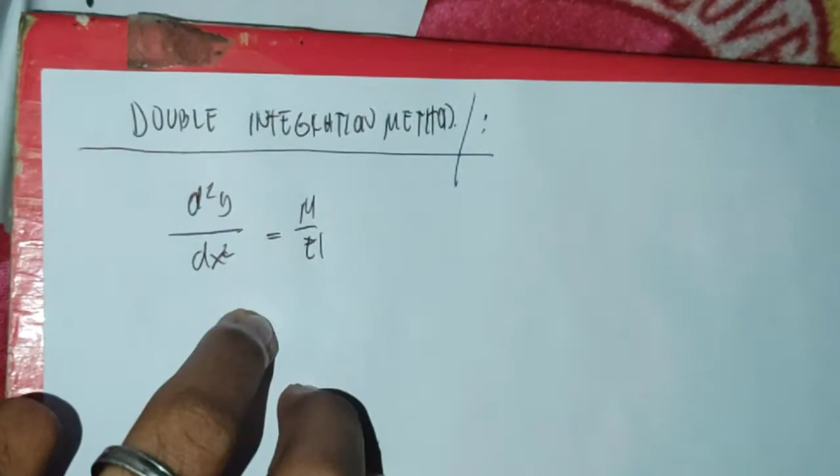In the double integration method, we have the equation d squared y over dx squared equals M over EI. This equation represents our curvature, which is also equal to y double prime.

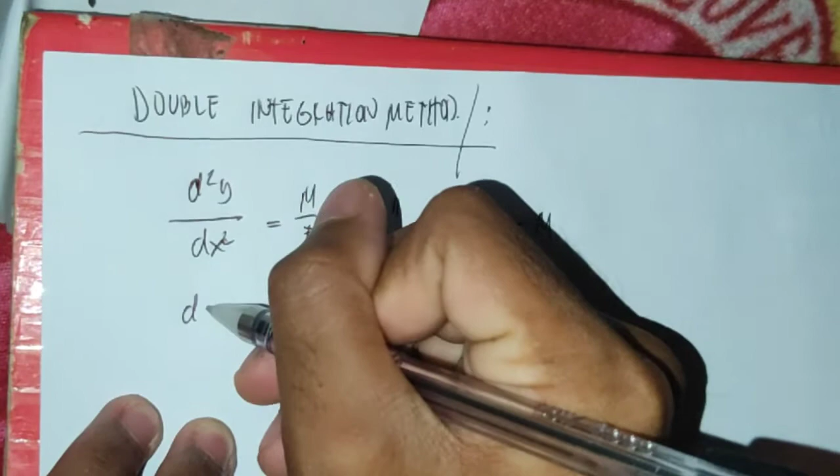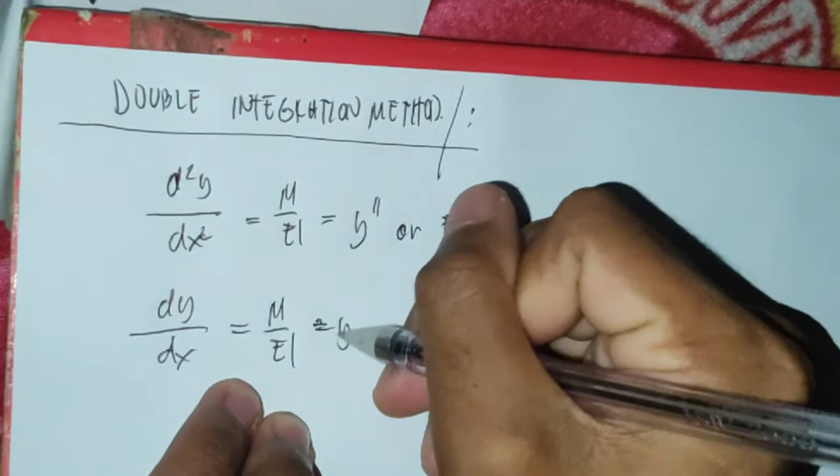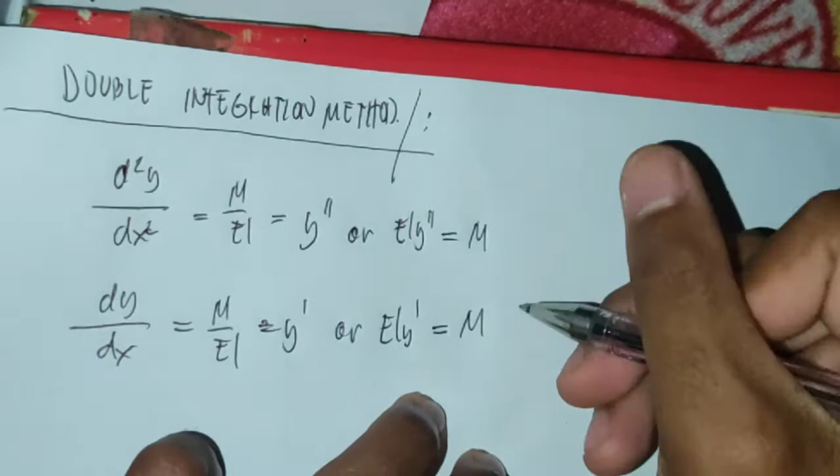Then we integrate this, giving us the derivative of y with respect to x equals M over EI, or EI y prime equals M. This equation represents our slope, or d theta.

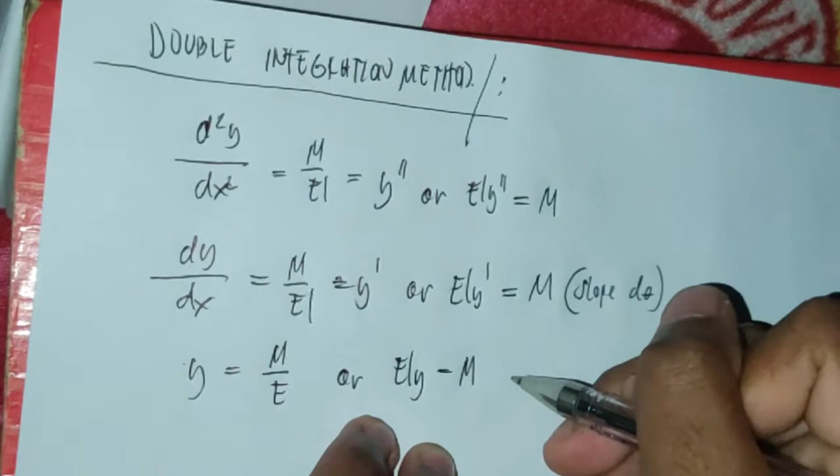Then we integrate this again, giving us y equals M over EI, or EI y equals M. This equation represents our deflection.

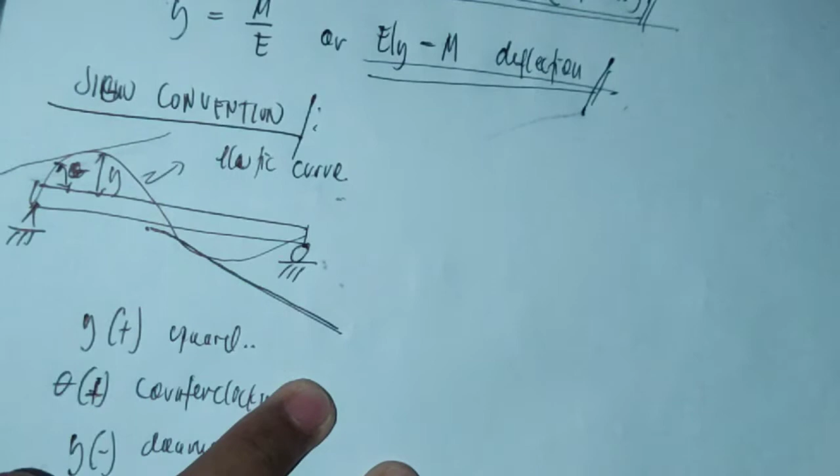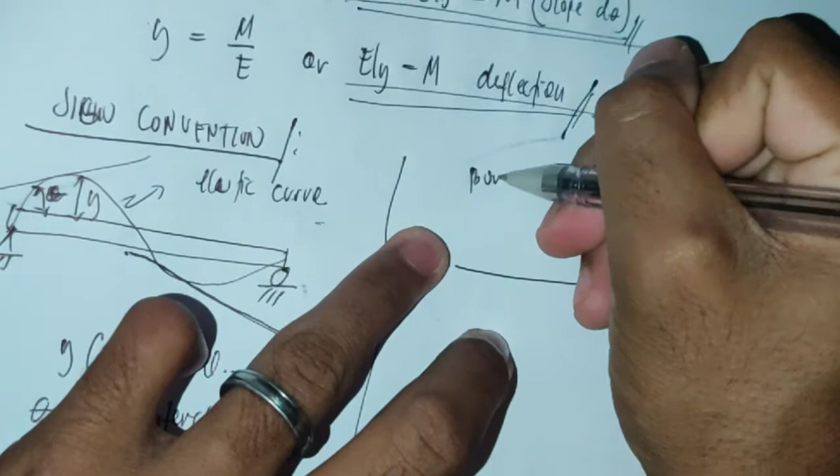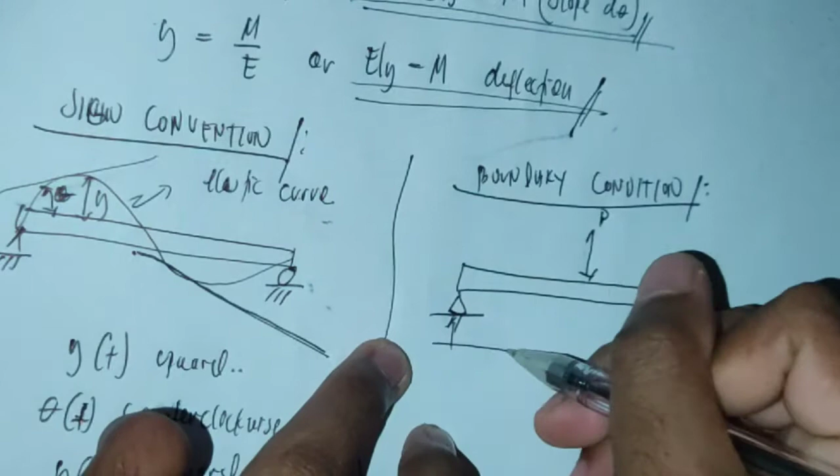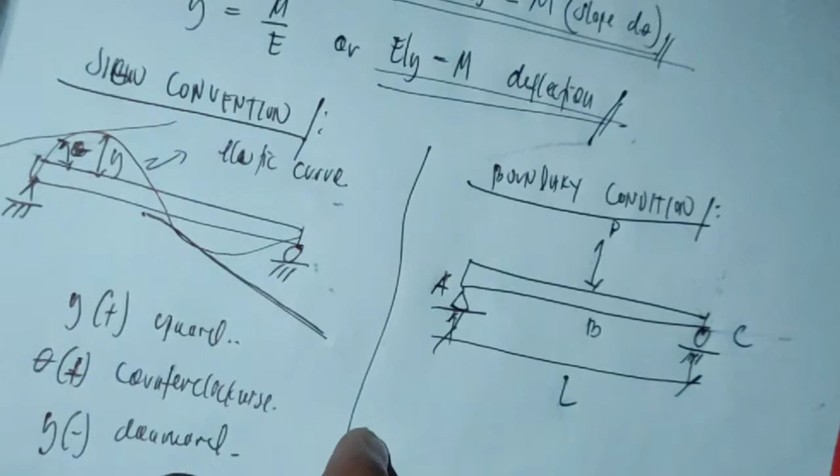We have a beam with two supports. Let's place a load P and distance L. First, let's label points A, B, and C. First, we make an equation from point A to point B.

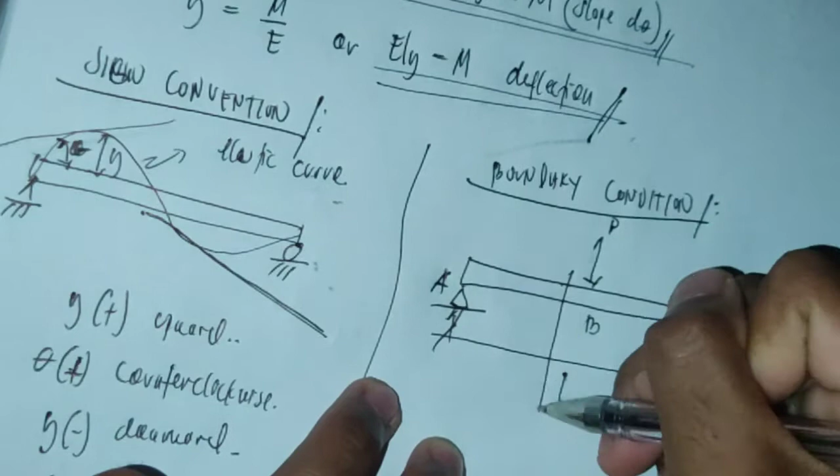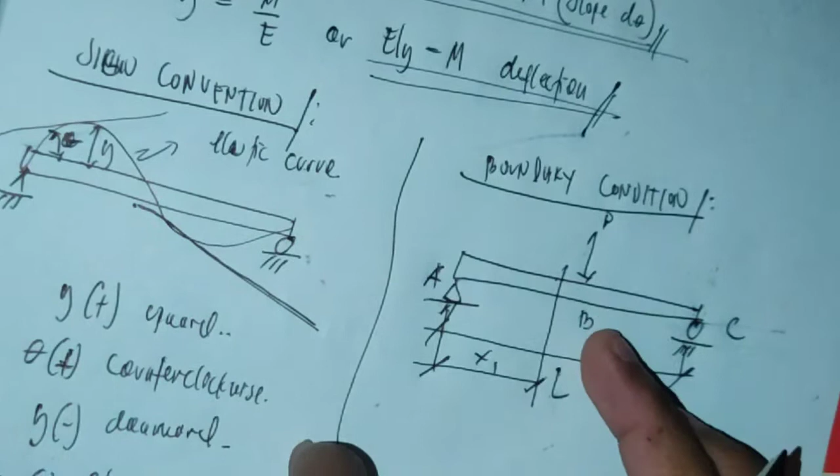Then we determine its slope and deflection. So here we have x sub 1. Then from point B to C, we get the deflection, and its distance becomes x sub 2.

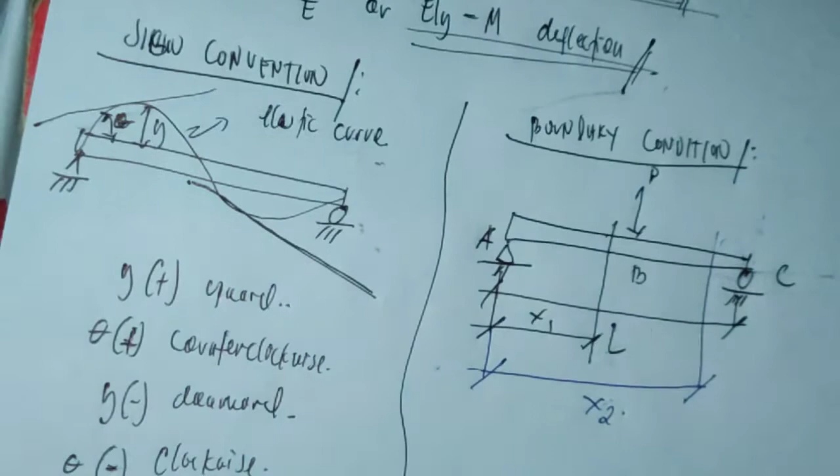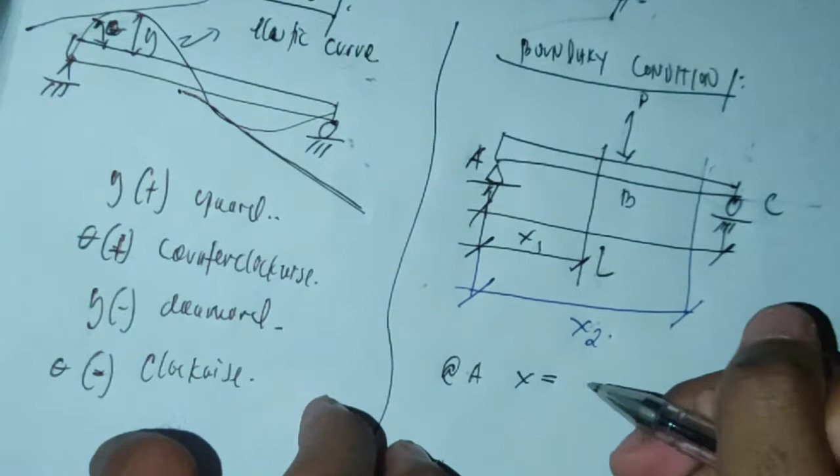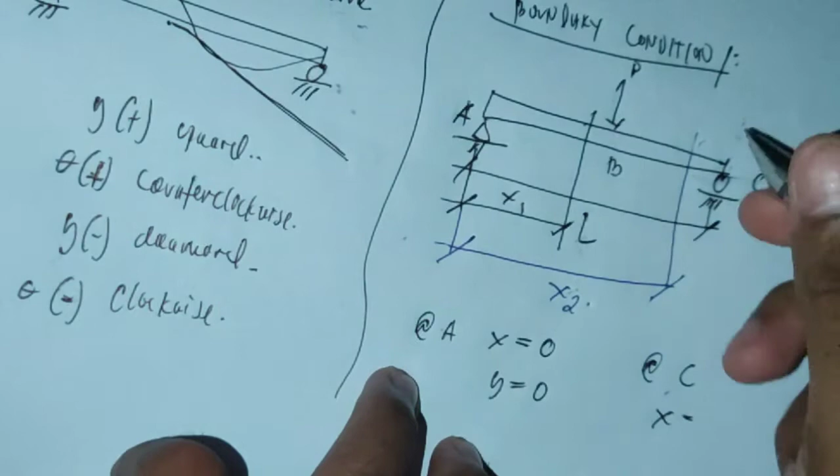At point A, our x is 0 and our y is 0. At point C, since the total is this length L, our y is 0. Then our slope here is not 0 because it has a pin and roller support.

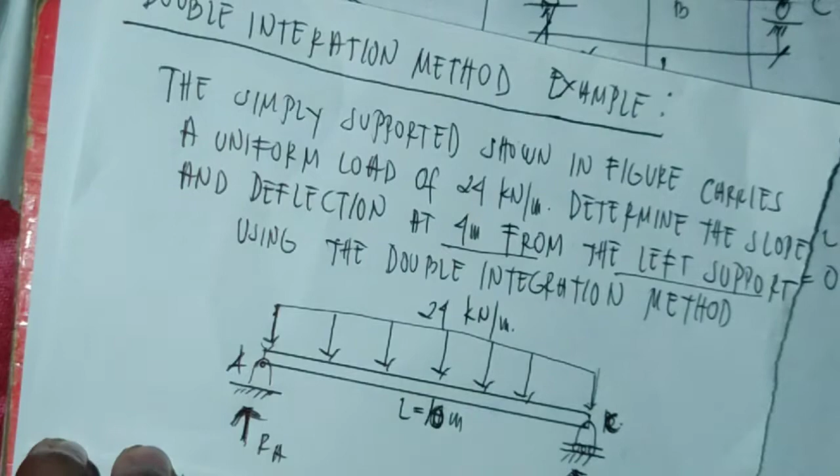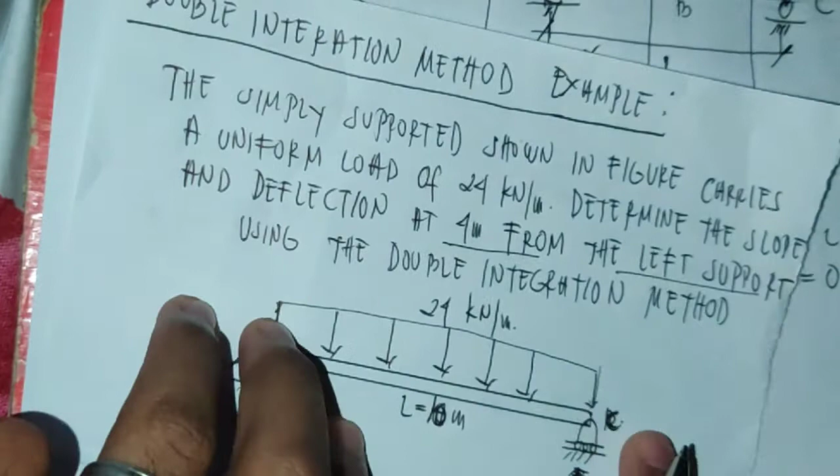So to understand this, let's answer an example. A simply supported beam shown in the figure carries a uniform load of 24 kN per meter. Determine the slope and deflection at 4 meters from the left support using the double integration method. So here we have a beam, two supports, a load, and a length.

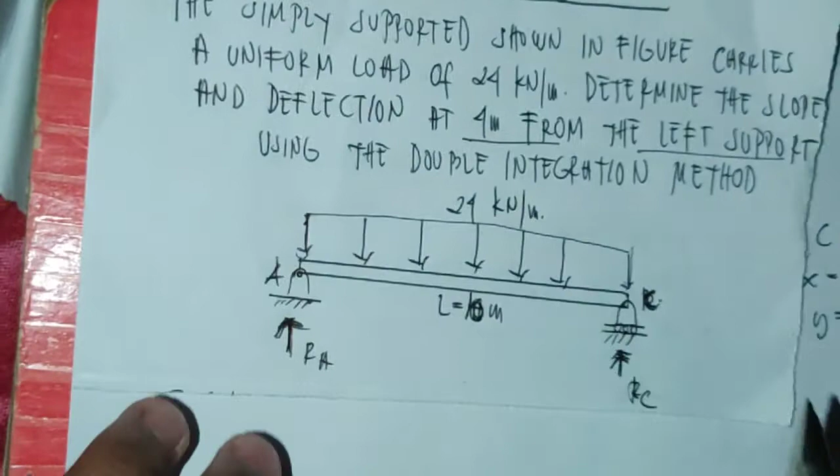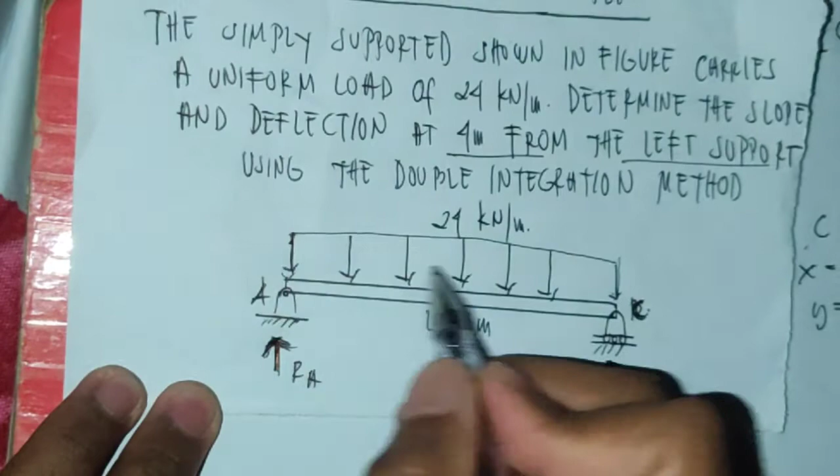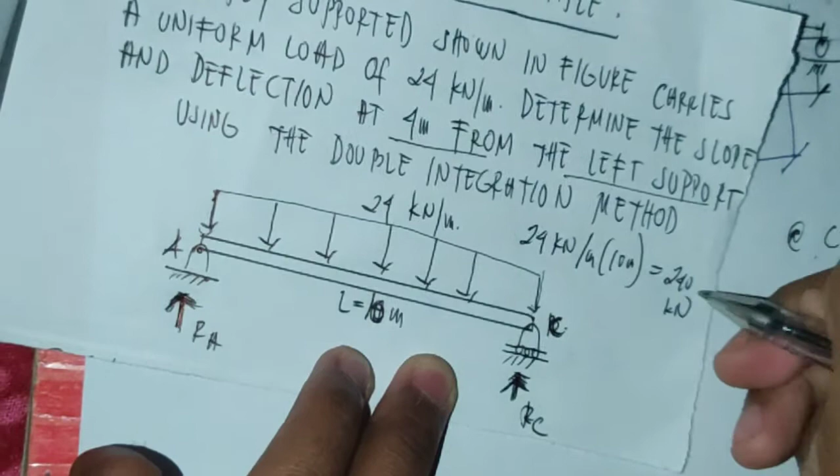This means for a uniform load, we compute 24 kilonewton per meter times 10 meters equals 240 kilonewton. So that's the total load.

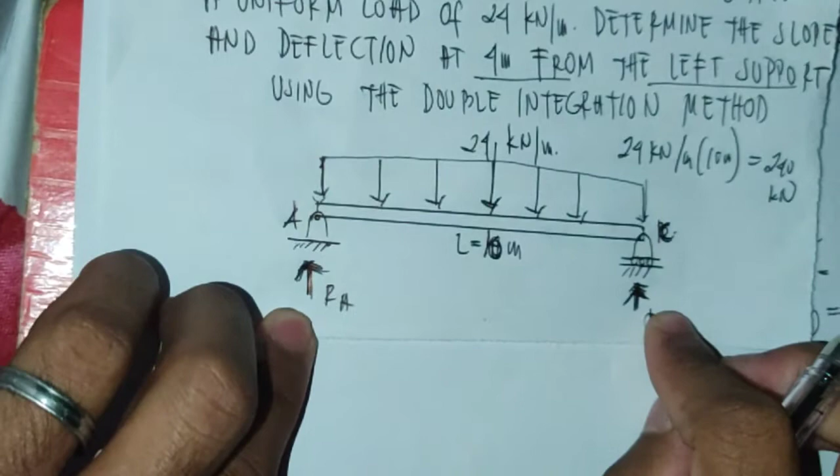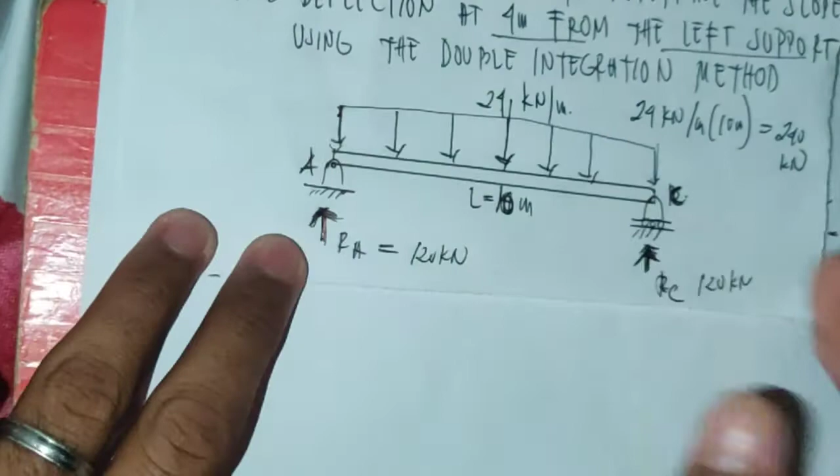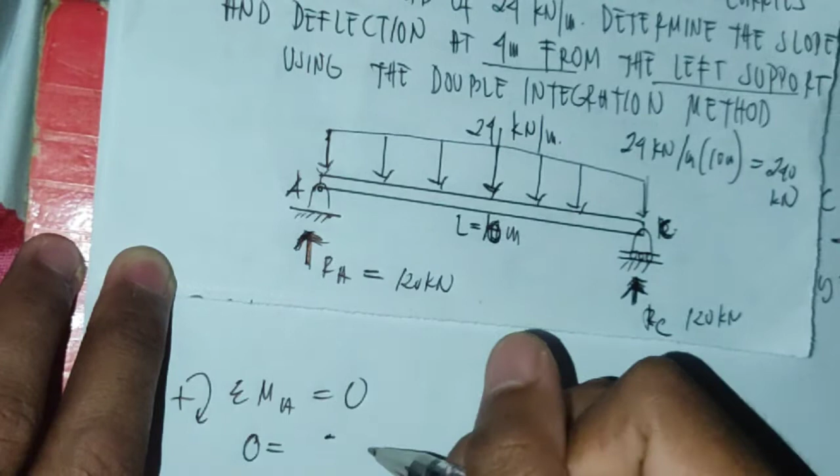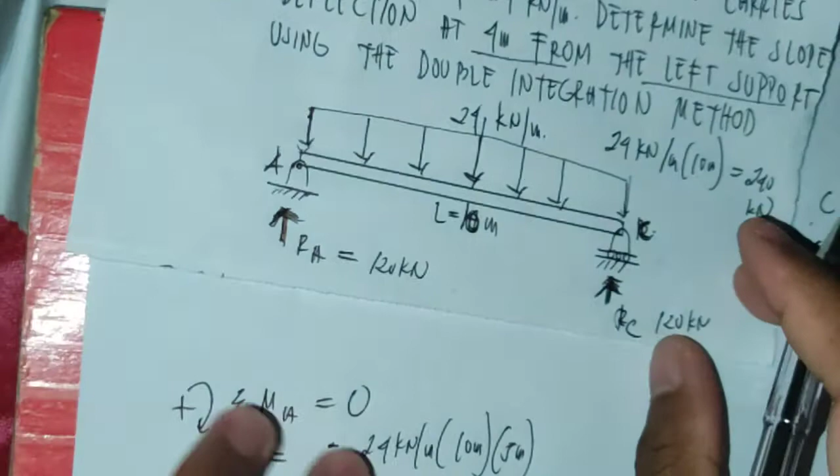So, summation of moment at A, with counterclockwise as positive: 0 equals clockwise, negative 24 kilonewton per meter times 10 meters times centroid, which is 10 divided by 2, equals 5. Then counterclockwise again, plus RC times 10 meters.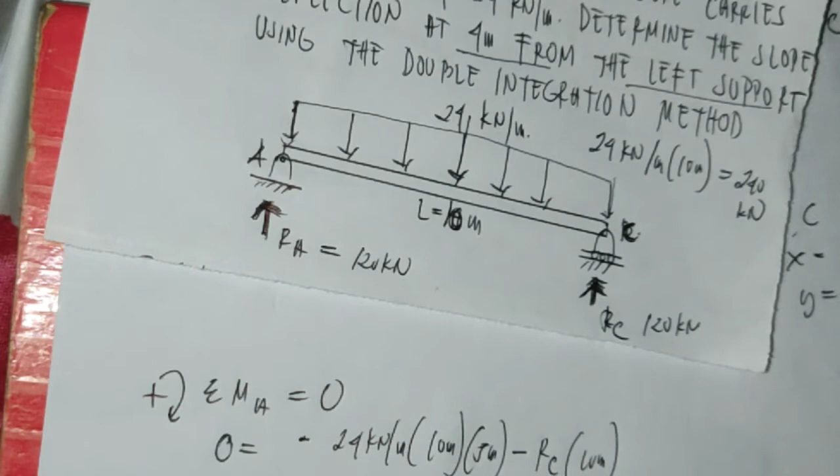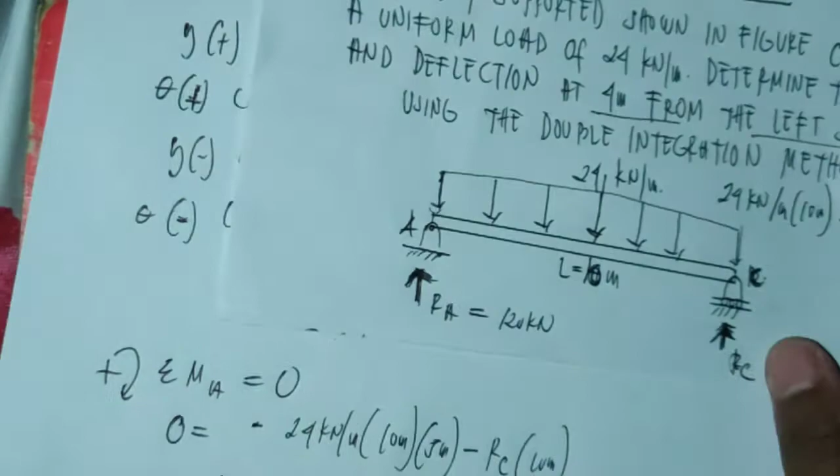So let's compute: negative 24 times 10 times 5 minus RC times 10. So that gives us 120 kilonewton. Now we know the reactions of the two supports. Let's draw our elastic curve.

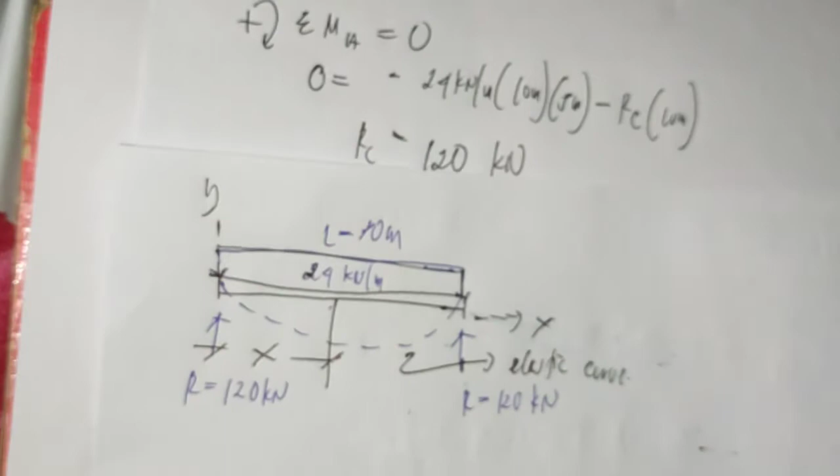So ngayon ito na yung ating elastic curve. Ito yung elastic curve. Slope. Tapos magkakaroon tayo dito ng deflection. At ang distance nito mula dito ay gagawin natin x.

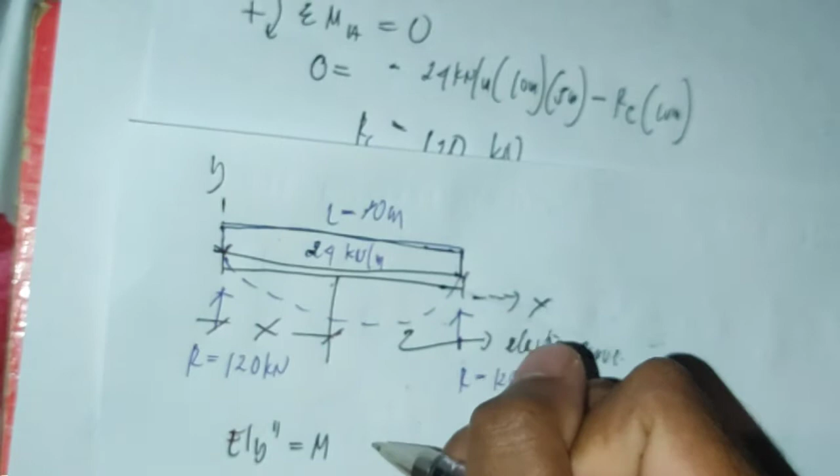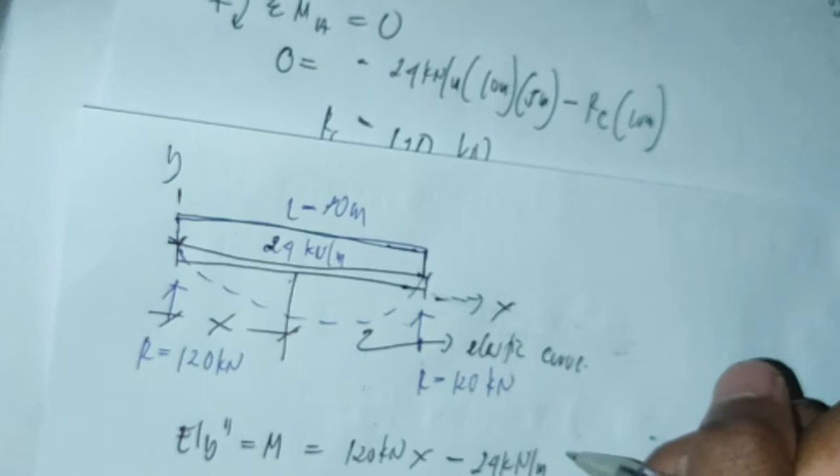So gagamitin natin dito yung mga na-derive natin kanina. Sisimula tayo sa EI y double prime is equals to M. So mag-moment tayo. So equals 120 kilonewton times x minus 24 kilonewton per meter times x times centroid na x divide 2. So, ito ay magiging 120x minus 12x squared.

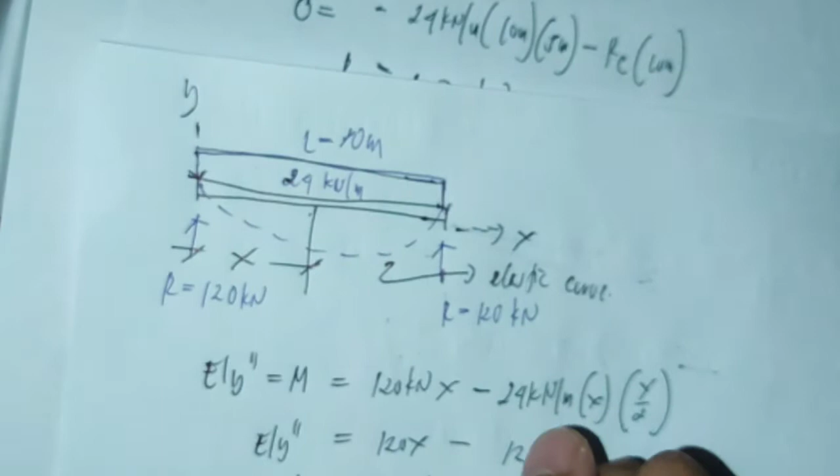Then, since meron tayong nakuha ang EIY double prime, integrate na lang natin to. So, EIY prime is equals to integral nito 120x squared all over 2 minus 12x cubed all over 3. So, simplify. Ito ay equals din sa 60x squared minus 4x cubed plus C1.

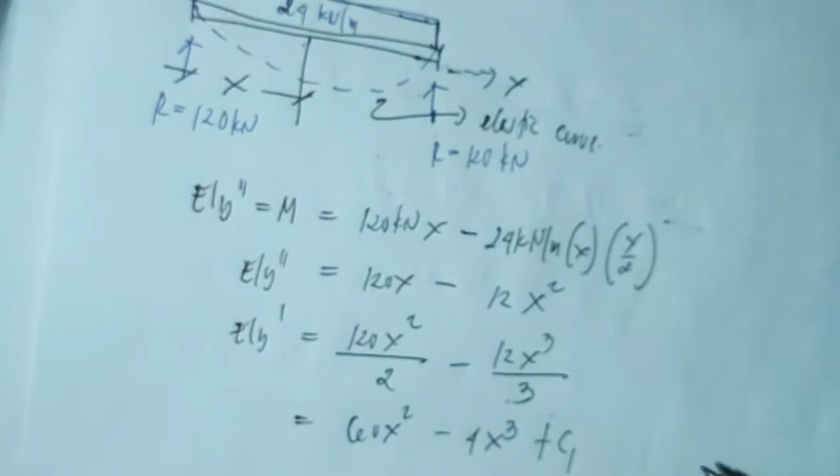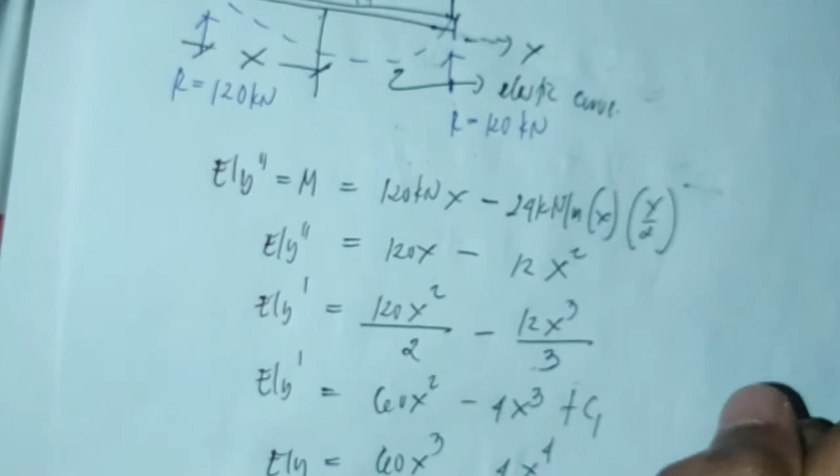EIY prime. Then, another integration. So, magkakaroon tayo dito ng EIY is equals to integral nito 60x cubed over 3 minus 4x to the 4th over 4 plus C1x plus C2. Then simplify. 20x cubed minus x raised to 4 plus C1x plus C2.

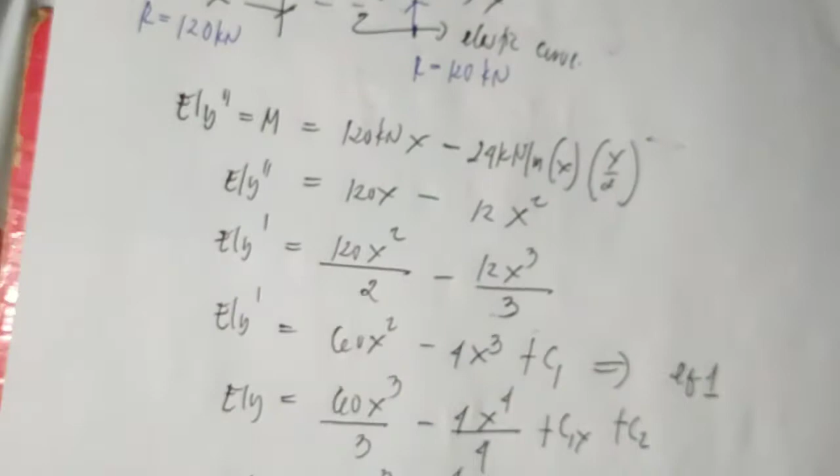Ito na yung ating equation 2. Ito yung ating equation 1. Ito yung ating mga gagamitin para sa pagkuha ng ating slope at saka deflection.

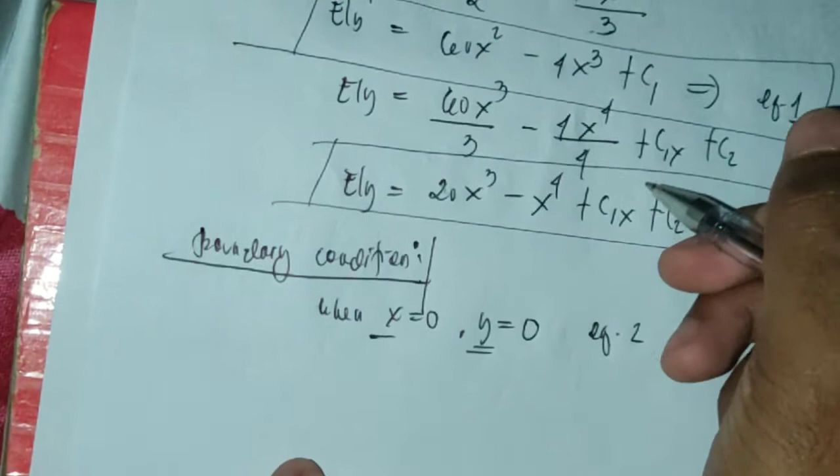Proceed tayo sa ating boundary condition. Boundary condition. So let's say when x is equal to 0, y is equals to 0. Gagamitin natin dito yung ating equation number 2. So when x is equal to 0, y is equal to 0, obviously, pag ginamit natin itong equation na to, lahat 0. Ito, 0, 0, 0, 0. Yung maritira is C2. So, C2 is equals to 0.

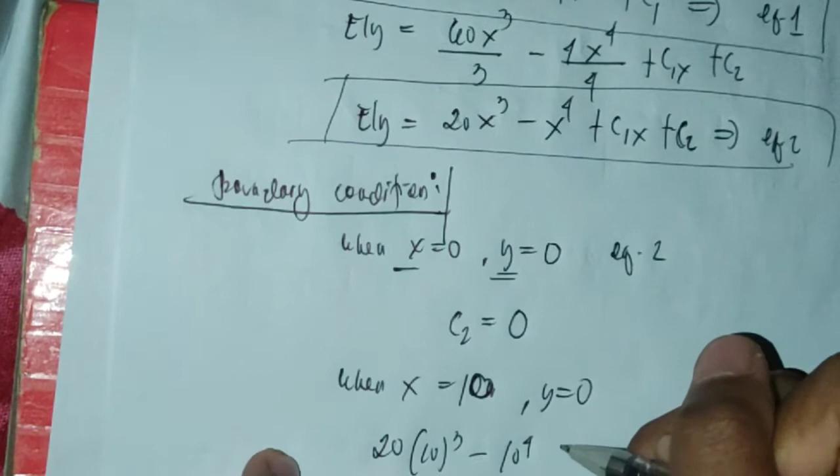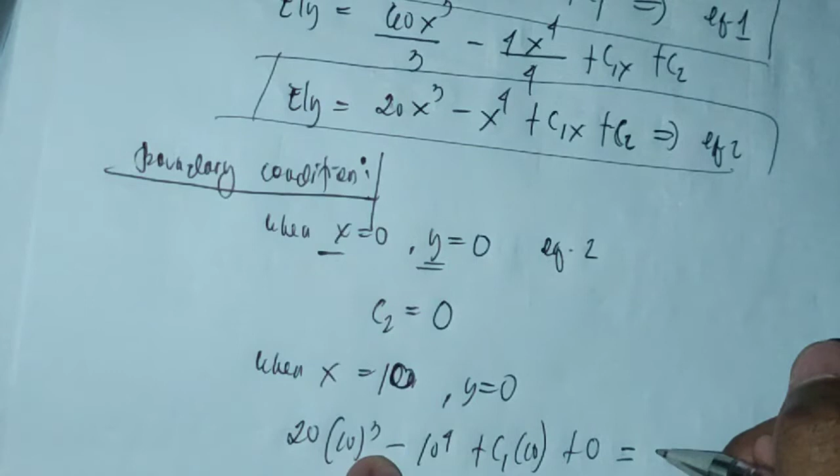When x is equal to 10 meters, y is equal to 0, substitute again sa equation number 2. Kakaroon tayo ng 20 times 10 raised to 3 minus 10 raised to 4 plus C1 times 10 plus 0 is equals to 0. Ang value ng ating C1 is negative 1,000.

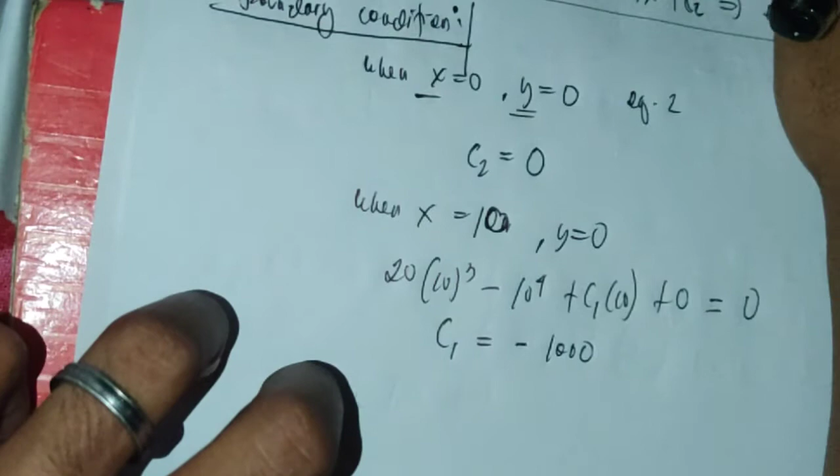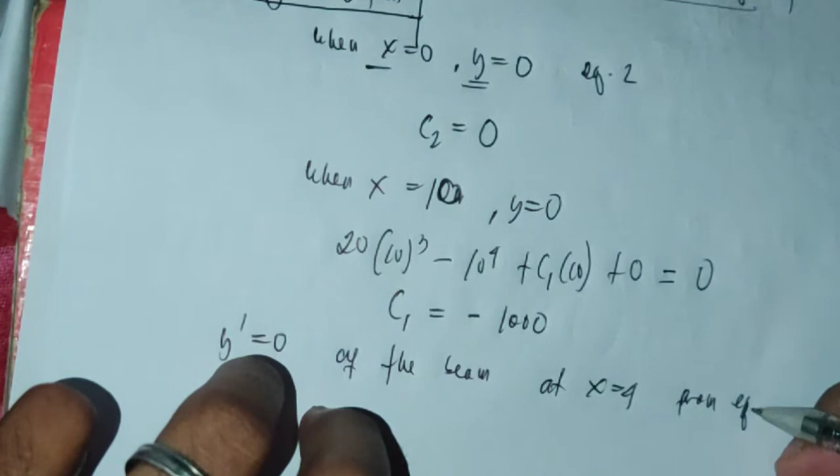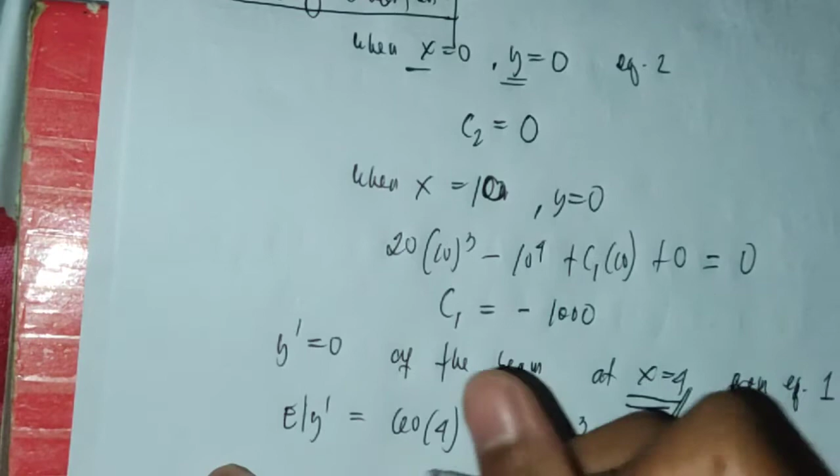And then, we can solve the rotation y prime is equal to 0 of the beam at x is equals to 4 mula sa equation 1. So, equation 1 yung gagawin natin. Ito yung ating isa-substitute. So, equation 1, EI y prime equals to 60 times 4 raised to 2 minus 4 times 4 raised to 3 minus 1,000.

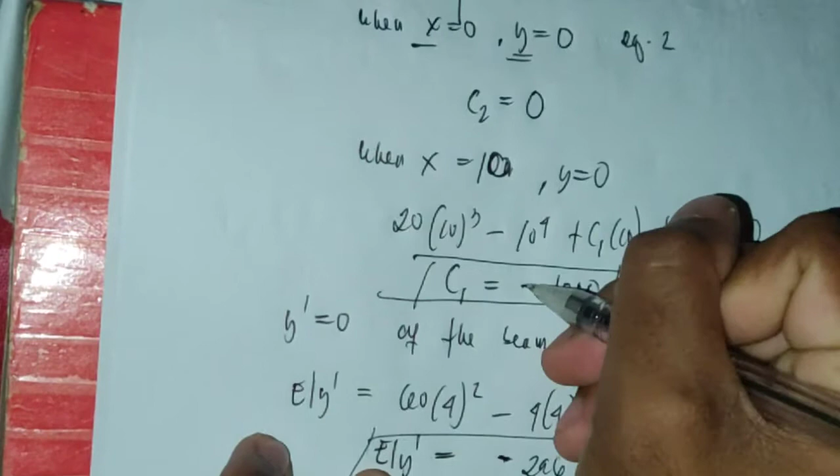So, yung ating EI y prime is equals to negative 296 kilonewton meter squared. Ito, mga value natin. Then, tandaan natin na yung mga negative sign na yan is nagkapakita na yung ating slope ay downward.

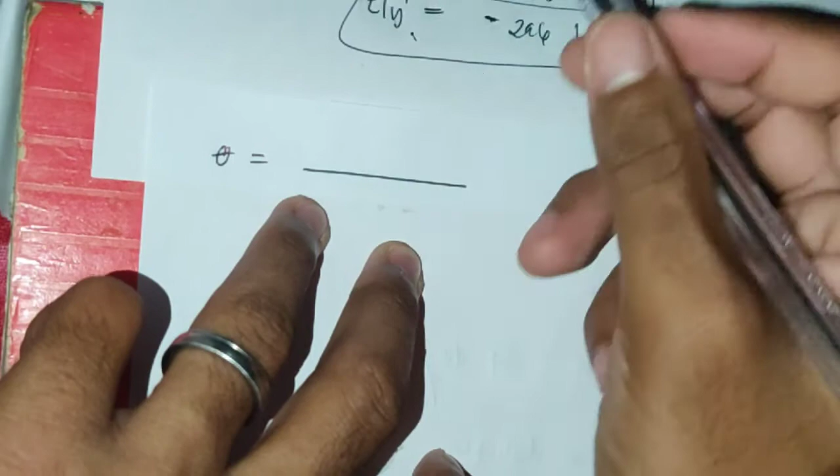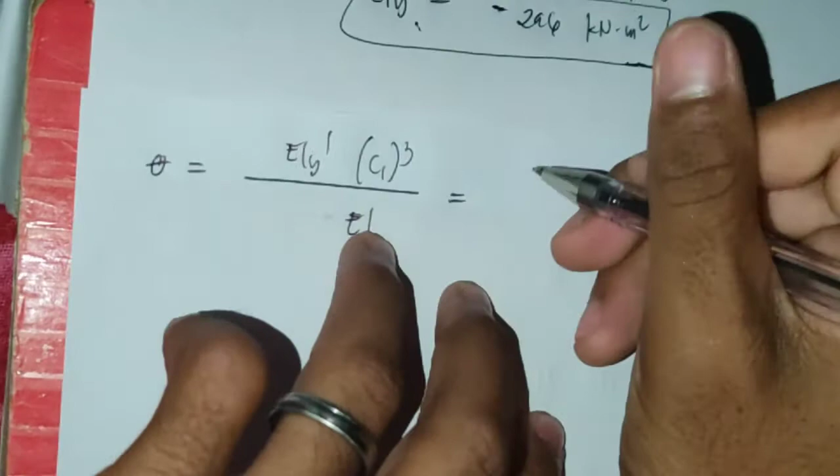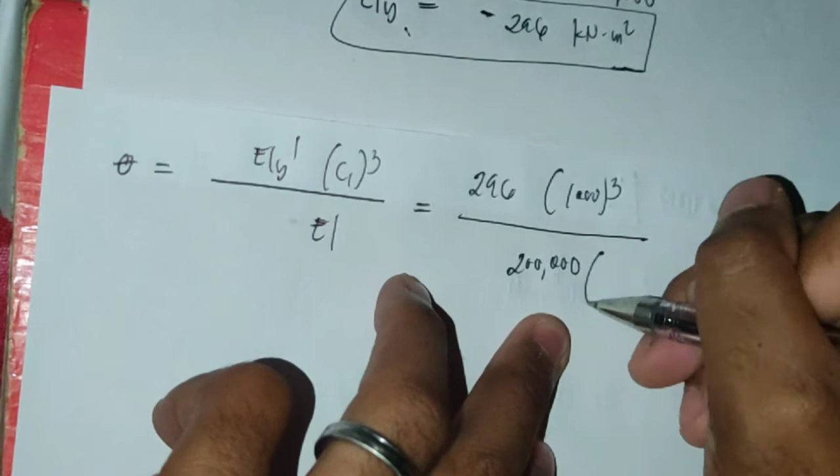So, para naman sa ating theta, makakompute natin siya gamit yung mga nakuha nating value kanina. So, multiply natin ito, or EIY prime C1 cube over EI. Substitute 296. This time gagamitin natin na positive na siya, times 1,000 cube all over 200,000 times 240 times 10 raised to 6.

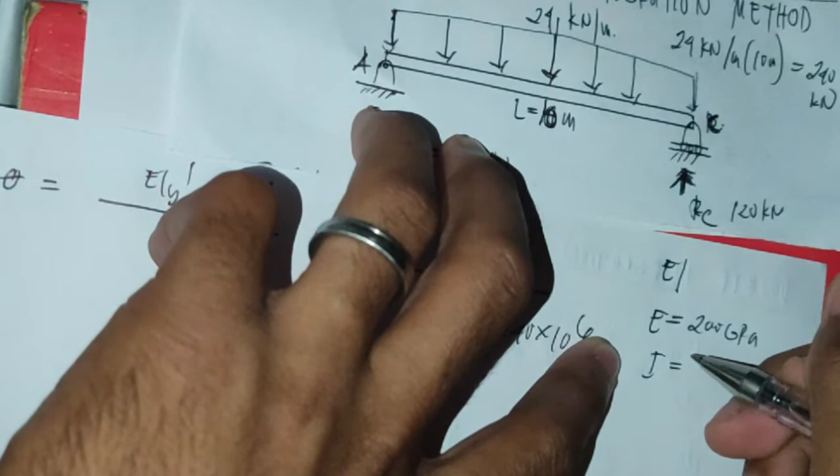So yun, hindi ko pala nabanggit sa problem kanina. Meron pala tayong given na EI kung saan yung ating E is equals to 200 gigapascal. Yung ating I is 240 times 10 raised to 6. So yun, sorry. Substitute lang natin yan dyan. Yan, makuha natin yung value ng ating theta.

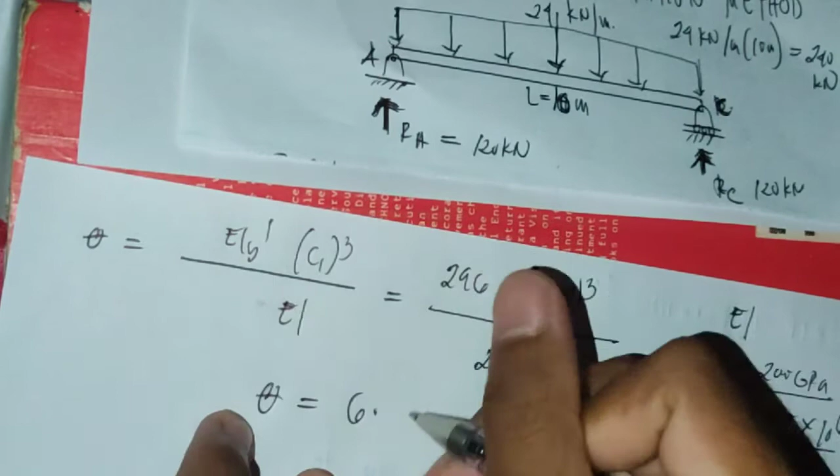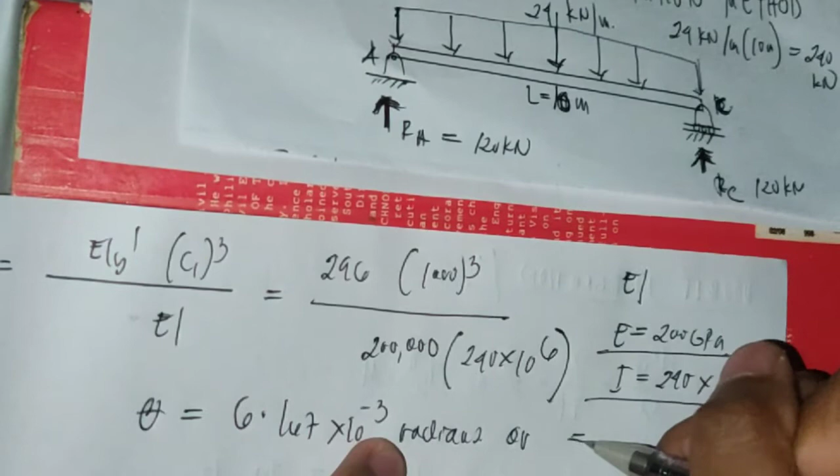Theta is equals to 6.167 times 10 raised to negative 3 radians, or 0 equals din siya sa 0.3533 degree.

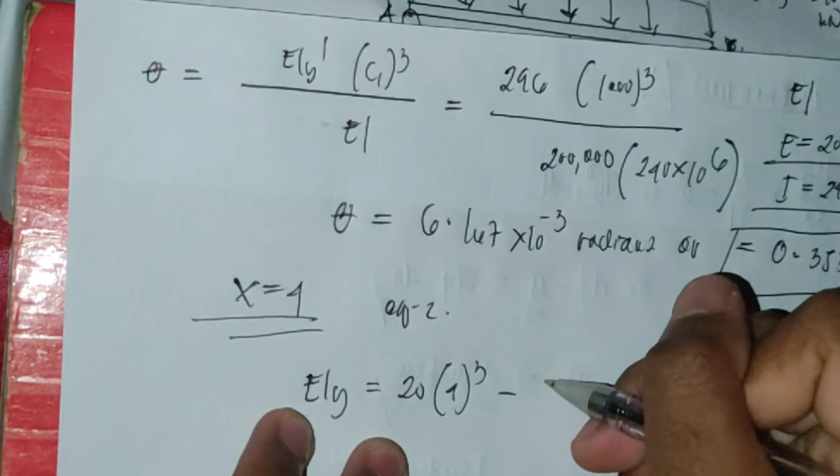Then the deflection at x is equals to 4. Malusolve natin siya gamit yung ating equation number 2. So x is equals to 4, gamit natin equation number 2, we have EIY equals to, substitute natin to, 20 times 4 cube minus 4 raised to 4 minus 1,000 times 4. So yung ating EIY is equals to

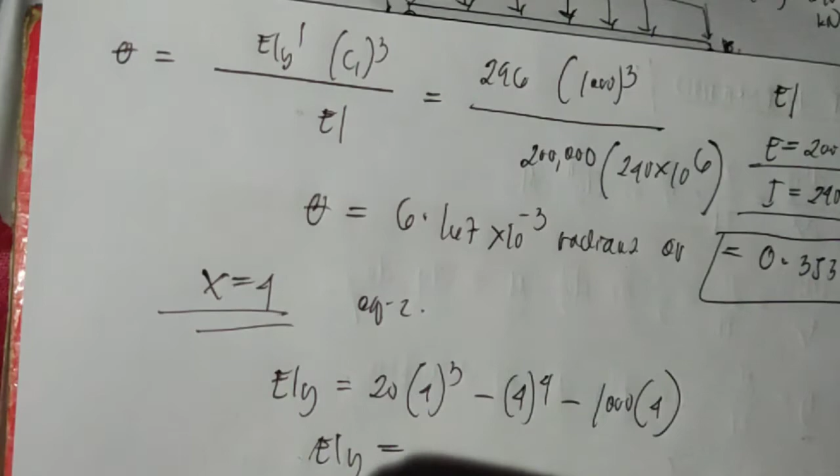EIY is equals to negative 2,976. Tandaan ulit na negative, ibig sabihin yung ating curve is below the origin.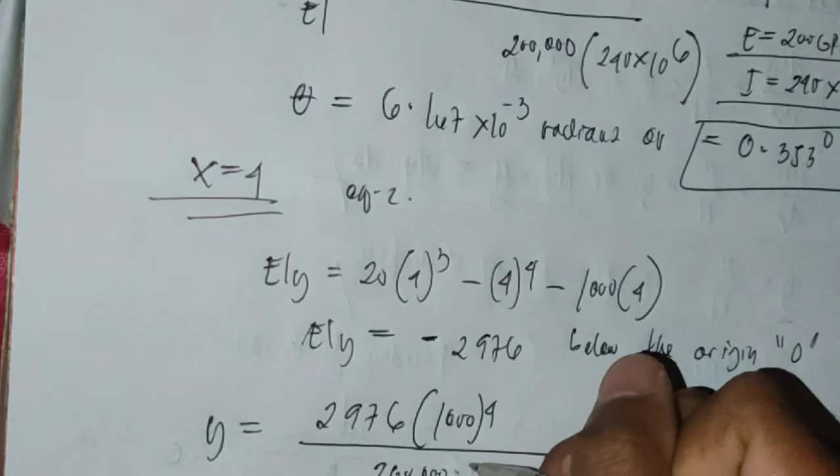So para sa ating deflection, 2,976 times 1,000 raised to 4 all over EI, 200,000 times 240 times 10 raised to 6. Yung ating deflection ay 62 millimeter. So yun, nakuha natin yung ating slopes and deflection.